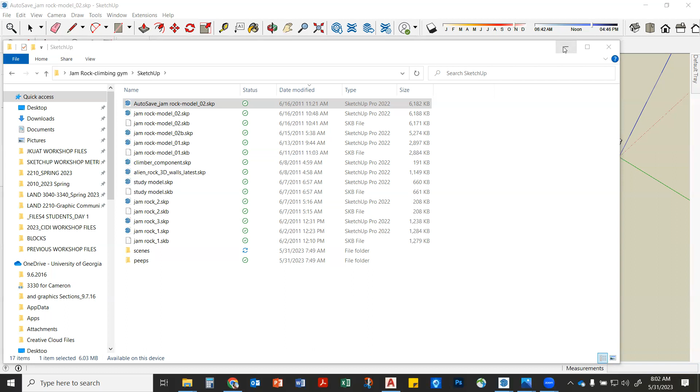Okay, so I wanted to show you this, I had to dig it up out of the archives. I spent 6 weeks before I moved and lived in Uganda. I spent 6 weeks in Uganda hanging out. There's this ministry down just down the way, and they were like, oh, we want to build a rock climbing gym. For climbing, right? And I used to rock climb back in America, and I was like, well, I know SketchUp, I will design you a rock climbing gym.

So I designed this rock climbing gym for these guys. They were just like, well, maybe it'll happen, but anyway, look, I designed this whole 3D thing. I just started using SketchUp. This was their whole idea, so I'm building this thing. You can see all these cool views we can do.

I'll try to actually show you how to make scenes. A scene is just like a window view. So I designed this whole thing, and I was like, man, I don't know if anything's ever going to happen with this. So then listen.

So then 10 years later, I'm in Athens, Georgia, where I live in the USA, and I'm flipping through this climbing magazine, it's just called Gym Climber, for people who climb inside. I flip open a page, and there's the climbing gym that I had designed. I was like, what? They built this thing.

So it's called Blue Sky Adventures here in Uganda. Have you guys ever heard of it? I'm hoping I can go down there and actually see it and be like, I should climb for free here because I helped design this place. Isn't this awesome? So cool.

So that's another plug for SketchUp. Once you learn to design in 3D, you're not stuck on landscape. I was like, yeah, I could figure it out.

I mean, they didn't build anything from what I designed, but I gave them the concept, and then they were able to raise money and actually get somebody to come in and design it and build it. So when I was first working with them, this is what the space looked like. You can't see it, but it's just an empty warehouse.

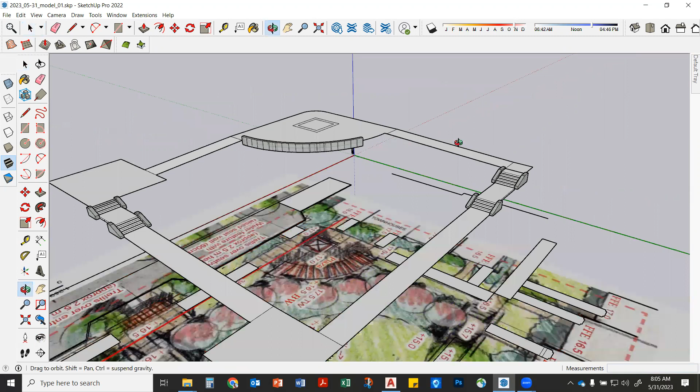But we're getting pretty close for you to be able to do most of the model. But now we need to build and model the 3D tin, and that's basically how we can quickly do topography. That's the cool thing about SketchUp. So that's what I want to do.

And then I want to close with a little bit of drawing, okay, and prep for tomorrow. So look, I've got all these section elevation trees. These are ones that I drew in pencil.

I just want to give you each one of these, and I want to trace them real quick. We won't trace all of them because I just want to spend about an hour doing it. But then I want to show you how I would render with colored pencils. I'm going to do it quickly, and then you guys can practice some of these, and I'll use the document camera and record it, okay? Does that sound good? Okay.

Because the workflow that we're doing here is not just SketchUp modeling. I use SketchUp so much, and then I actually go back and forth and use hand graphics, because this section that you got yesterday is actually cut through our model. It's cut through that little site wall right there that I just drew up here on the board, that we just modeled. And there's a little trellis there. I'm going to show you how to drop that trellis in there tomorrow.

And then I'll probably jump ahead and show you how to cut a section on this, because once you have the SketchUp model, it's really easy to export a section like this. You can even clean it up and actually use that section in your drawing set, or you can draw over it like I want to do.

Okay, good. All right. So I'll try to keep all the long random rabbit trail lectures down so we can get through all of this, okay?

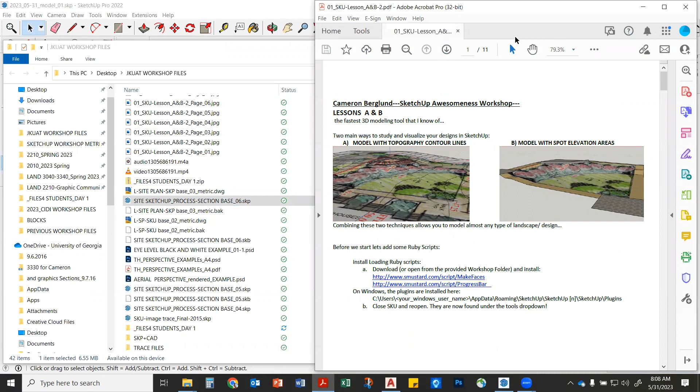Might take a minute, but here we go. All right, so we've been working on this, right? Now the next thing we're going to do is create this tin right here. So we've got all of our walks done, and we even have it better than this one. Looks really nice. We got stairs, we got walls.

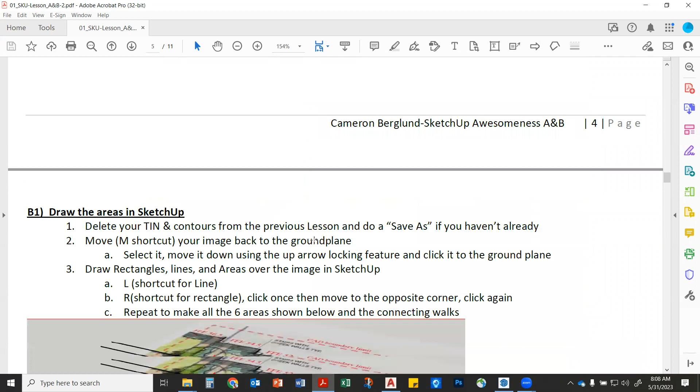So look, if you're not sure with the process, it's also in this PDF that I gave you. So if you follow things better by reading them, you can come through and actually follow all of this along.

Now you'll notice that on the plan in there, the units are different, because when I initially wrote this whole lesson, it's all in imperial units, in feet. But don't worry, the only thing it changes is how high you move your things. So the whole workshop, the whole lesson plan will work because we're doing the same thing. You'll just be doing it in meters versus feet, okay?

So we went to there, and then we're here, right? We're about to do this guy right here: number 6, create a tin surface.

Tin, tin, tin, tin, right? Yeah, we can cheat. Okay, yeah.

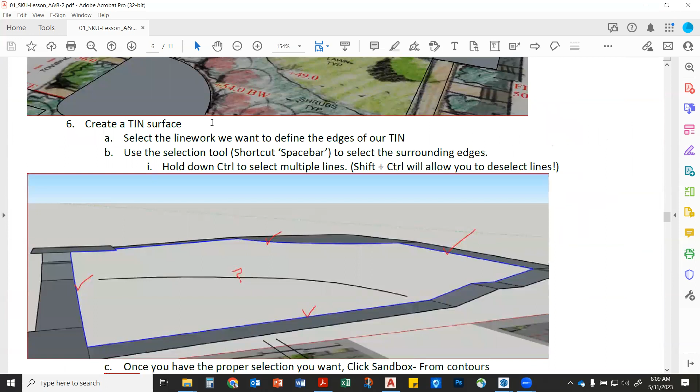And you'll get bonus points tomorrow if you find out what tin stands for, okay? Because I should know that, but I don't. I know it's triangulated something network, but that's it. Don't tell me now, you won't get points today. You got to show up tomorrow to get those points, okay?

So look, all you have to do is select the line work you want to define as the edges of the tin. It's hard to see up here, but if you look on your PDF, I'm just outlining this whole thing. Some of us did it yesterday, yeah?

Now, the only tricky thing is that some of these things we've been working on are in different groups, so in order to select that line, you have to go into the group. So just for the ease of doing this, we're going to explode not our actual walls, but just the walks, so that we can select all of that line work. I'm going to walk you through it, don't do it yet.

I'm just talking through it. Then we're going to select all of that.

We're also going to draw this contour in there because we have spot elevations for that. Then once we select those, pow, see that? Pow, pow, pow, pow, right? We're going to press one button in the sandbox from contours, and then we're going to get this beautiful tin right here.

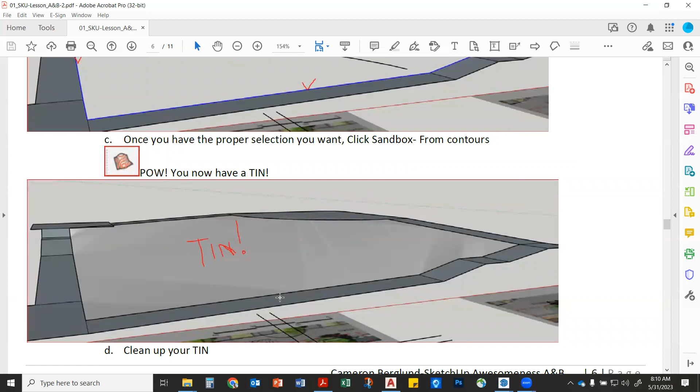Okay, and then we're going to have to go in and clean it up a little bit, because when SketchUp makes tins, it connects all of the lines to all the other lines. But there are areas where we don't want it to connect, like on that walk, we don't need a tin up there—we already have a flat surface. So we'll go in and clean that up a little bit.

Good? I'm giving you the overview and then we're going to walk through it together, yeah? And then you'll have this. So, tin, okay.

And then from there, I'm going to show you how to cut a section. And look, the same thing—we're doing the same thing that we did with all of those other things, right?

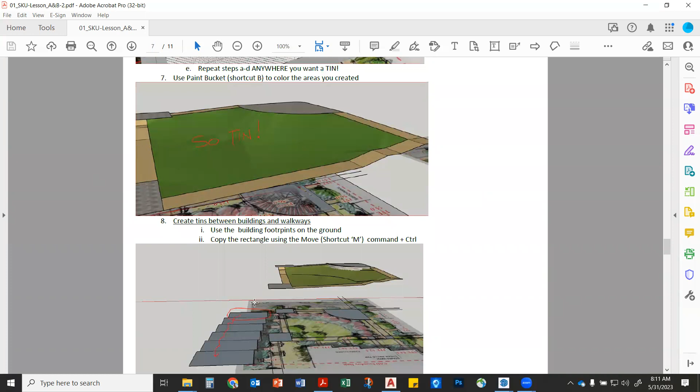We're going to import the footprints for each one of those townhomes. You see this? We're just going to go File, Import, bring in the townhomes. And then for every one of those townhomes, we have a finished floor level, right?

And you're going to make that a group and you're going to extrude. Actually, they're already blocks, I think. So you're going to extrude those up to the correct height right next to your walk.

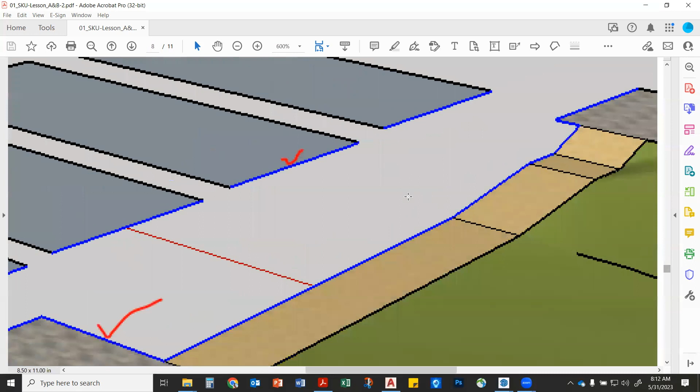Right? You're gonna build the walk down here. And then once you know how to make a TIN, you're going to select all those areas in between. See all those blue areas? We're selecting those lines, and then you're going to press that one button and you're going to get a real nice TIN.

Isn't that cool? And then we have to clean it up, because remember, SketchUp doesn't know - it's going to connect all the points that you highlight, so it's going to do some of the ones that you don't want. So you have to go into the TIN and delete some of those. Okay, we could do that.

And then we're going to get somewhere like this. It's going to be awesome.

So this, especially for landscape architects, working with TINs is like the name of the game, right? It really helps you to visualize what you've actually drawn, and then also critique it and figure out what's working and what's not working. And so working with surfaces in SketchUp is actually pretty easy, so you can change things pretty quick. I'll show you how to do that.

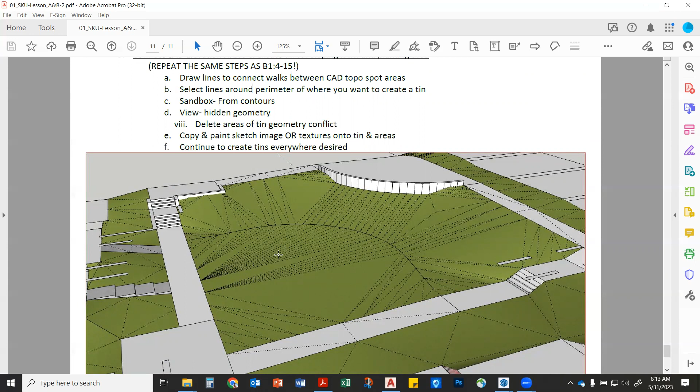Okay, we ready? Who's excited? We got one, we got one. Good, well, we'll start with one. That's good.

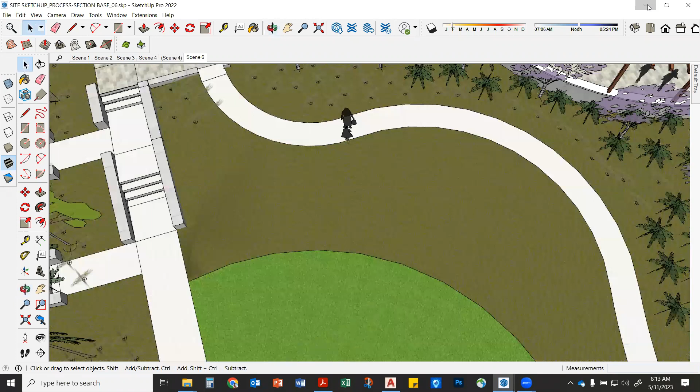All right, so look, this is where we're headed, right? We're going to make this surface right here, this TIN right here. We're actually going to make a couple of them. This one - tomorrow, if we have time, I'm going to show you how to put this walk on there. It's going to be the correct slope, and you're going to love it. So there's that one, right? But we are right here, yes?

Okay, so you've got some walls. Now what we're going to do - oops, my wall's still messed up here. I'll fix that in a minute. But for the ease of what we're doing, I want to double click into here.

And this is what you're going to have to check. Can you go around and select each one of these lines? Can you guys see it on the board? A little hard to see. So can I select those? Now the question is, how do you do it over here, where those walls are?

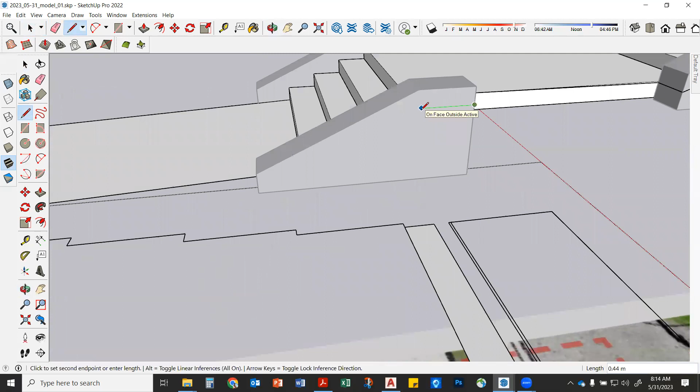So what we're going to do for this exercise - there's a couple ways of making the TIN. You could actually draw a line like this, and say I want the soil to come down like this. And I could make the TIN just like this, and this is exactly where the soil is going to go. And then this is where I get to play - how steep do I want this to be? Do I want it to start here and slope down? So this is one way to do it.

And then I could select this, I could select that line. If I over-select, I could Control Shift to deselect, and I could keep working my way around, piece by piece. So that's one way to do it.

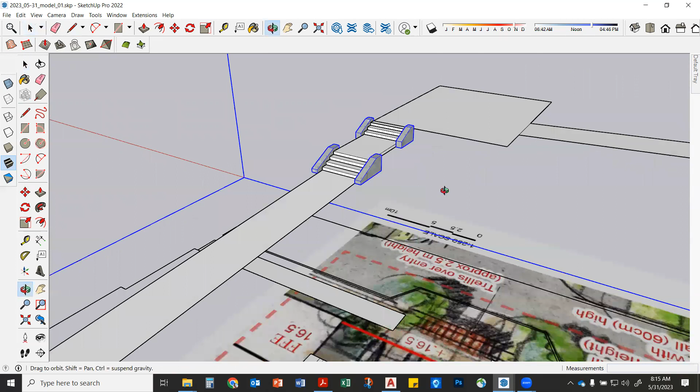The other way to do it is - let me undo that - so the other way to do it is similar, but what I'm going to do is I'm actually going to hide or freeze the layer that I've got for my walls. If I come over here, my default tray - if I hover over that, it should open, and I should be able to, if you have to close some of these little things to find it, close some of those by pointing or hitting that little triangle.

I want to come down to tags. Because the nice thing is all of my layers, when I bring them in from CAD, are going to be there. And so I should be able to turn off the L wall layer. Oh no, didn't. So ideally, all of my walls are on a wall layer, and I can turn them off.

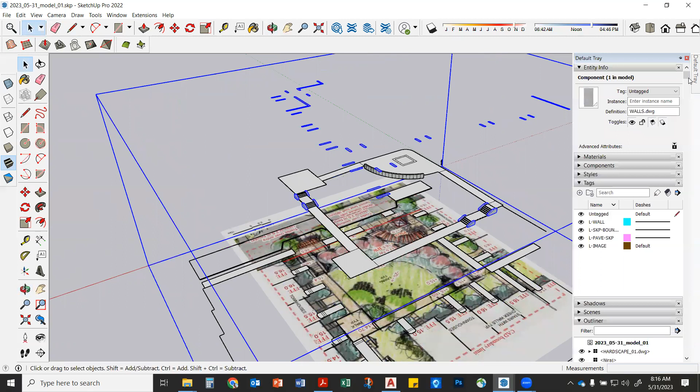But I had them on when I extruded them, I'm not sure what layer they're on. Ah, they're untagged, right? So watch - I could grab this whole thing and I could actually come over here and drop them back on the L wall layer, under entity info. And then I should be able to turn them all off. It's not deleting them, it's just making it so I can actually see. Everybody see that process?

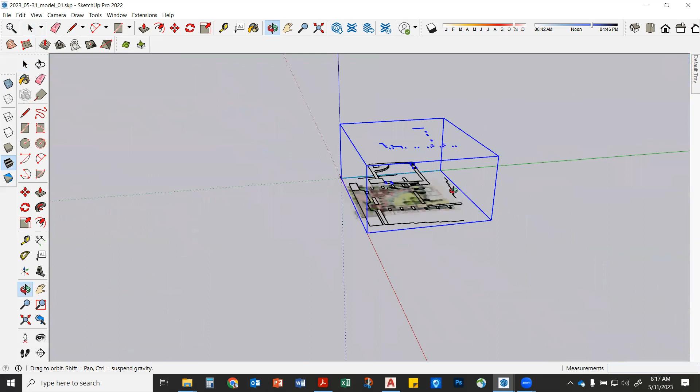So you can click on the walls, even the ones that are up here. You could double click - oh, not double click, just single click - so you have the whole group. Does yours look like this when you select one? All right, and then you could hover over here until it pops out the tray.

And then the top one should be entity info - this is like the properties of whatever you've selected. That's kind of hard to see. Hang on one second.

Okay, so when you hover over the side where your tray comes up, you should be able to come over here, and then right here it should say 'untagged.' So right there where it says L wall, yours will say untagged, right? It's probably not on a layer or a tag. So you can actually click here and then drag it down and put it on the L wall layer, or L wall tag.

Good. Then when it's on the L wall, hopefully all of those will be on there. This wall over here is not actually on there, right?

So I'm going to snag that guy too. Oh, I can't, it's in that. I'll have to go get him.

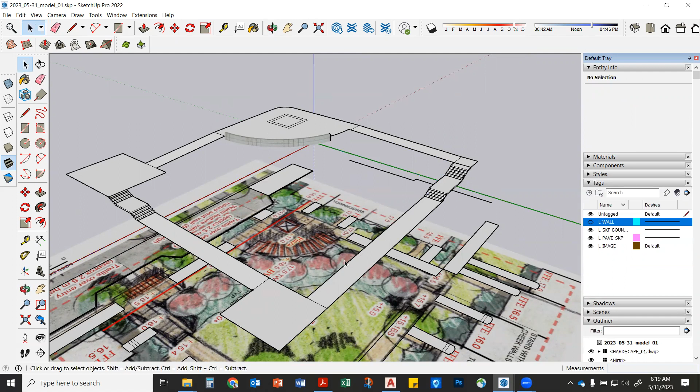So I'm going to show you both ways to make the tin, but this would be if I was doing this quickly, this is how I'd do it, okay? Because it's a little bit easier if we do it this way. So everyone's walls are turned off, or hidden.

Okay, let me go in. I have to go in and get rid of this guy. So what am I going to do? I'm going to go into the group it's in, Control X, right? Oops, I need to turn that back on.

We go back into this group. Then what am I going to do? Edit what? Paste in place, right? I'm going to place it into this group. So now when I turn that off, all of them should go off, yeah?

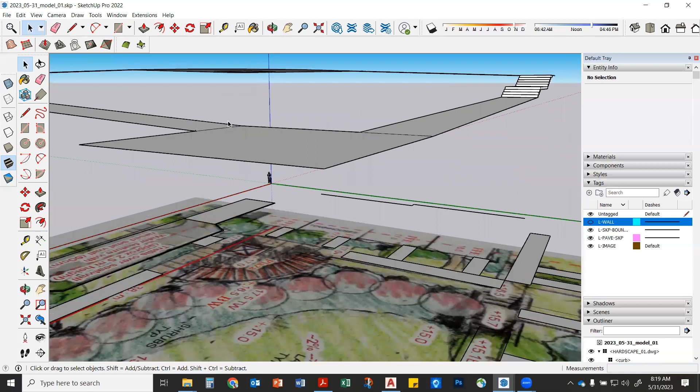How are we doing? That look good? Yours look like this, or close to it? Perfect.

Now there's a couple other things we need to do. Look, we look at our spot elevations. We've got the perimeter walk worked out, right? We've got plaza at 17. We got that wall in there that we made. We got this little lower area at 16.5. We've got, all the way down to 14.7. We got our stairs and all that stuff, right?

But look, in the design, there's also a 2% lawn at the bottom, right? So if we don't actually put these spot elevations in, this isn't going to look correct. So all we need to do, I showed some of you guys this yesterday, we need to make sure that we have a line from here at 15, 15, 15, yeah? And then we're going to select that as one of our edges when we make the tin, and it's going to make the surface including that elevation, right?

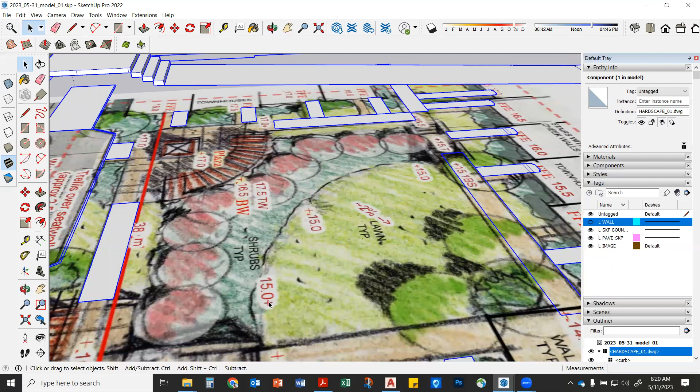Close enough, just follow me, you'll see why we're doing it, right? So watch, we got 15 right here. That should be right around there. So what we're going to do is we're going to come in.

We're going to use the arc command. You could do it in a lot of ways. You could come in here and draw it freeform with this little freehand drawing, you could go like that, but it's going to look really ugly, yeah? Because you'll see that SketchUp's going to triangulate between all the points on that line.

So what I want to do, Control Z, we're just going to use an arc. So you can type in A for arc, or you can come over here and select that little icon that says 2-point arc. Okay.

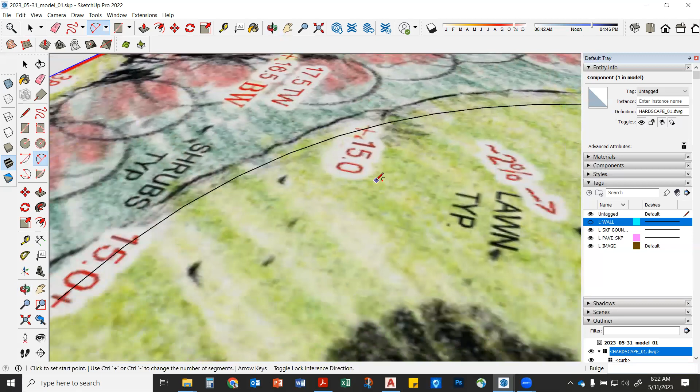Good, and then watch, I'm just going to go to that little plus because that's where the 15 is. I'm going to go click, one, click, let go. And I'm going to come over here and click this one, click. Then I'll come over here and I'll click my third. See, it lets you choose where you want it to be, right? Should be able to click it right there. Good.

Repeat, okay, so we're here. It doesn't really matter, I guess we could click, you could do it inside this group, but we'll just move it in there because we know how to do that, right?

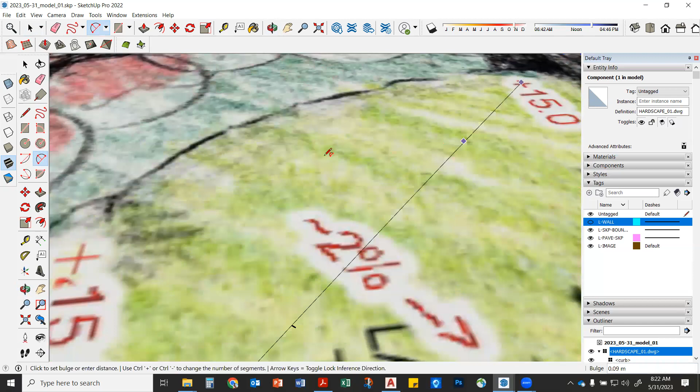So you're going to hit A for arc. The first point, now this is a 2-point, it's called a 2-point arc. So you're going to do the beginning and the end, and then you're going to assign the middle. Okay, so watch, you'll click on this 15 right here, click once. Now it's asking for the end point of the arc. Click there. And then we're coming over here and we'll click, pretty close to right there in the middle. Okay, good.

Now I want that line to be in this group. Why? Because I'm going to use it as one of my edges to make the tin. And I can't make it in between if there's things that are in a group and things that are outside of a group. All the line work has to be next to each other in order for me to select all the line work and then make the surface. Okay.

So before we do that, what height should this be at? How do we do that? Once you select it, right? With an arc, you only have to click it once.

M for move. Pick the point on the end, click once. Lock it to the upright with your up arrow and type in 15. Okay, now hopefully it's showing up something like that, right?

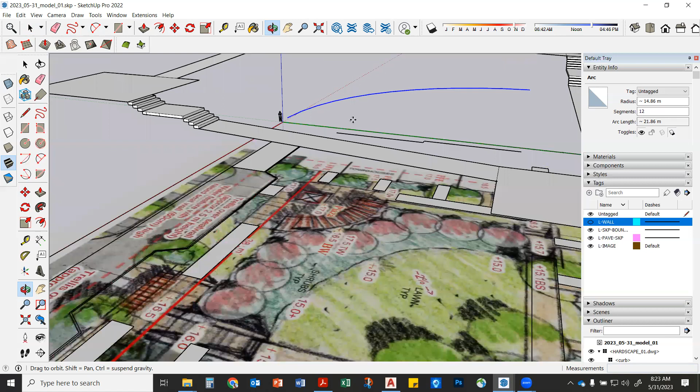Good. But is it in that same group? It's not. See? So how do we get it in that same group? We're going to cut it, paste in place once we're inside that group, right? Control X.

Double click inside that group till you're actually in there. You can tell you're inside of a group when you're able to select some of the lines or the faces and it doesn't show up as a big blue box. Like, see this, right? This is a component or a group inside of our group, but we're in the main group because we're able to select elements that are inside there, right?

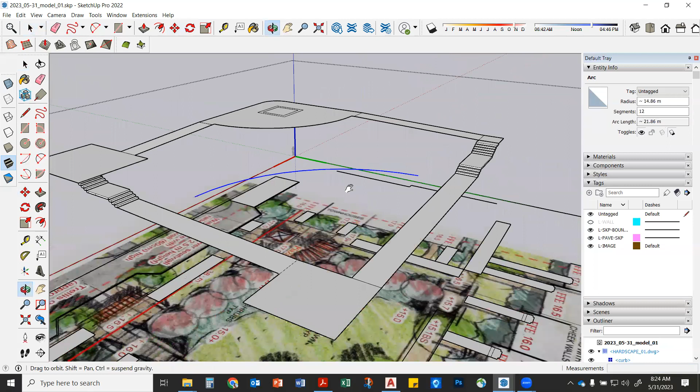So then we're going to do edit, paste in place, boom, right? Right?

All right, now while we're in this component and we're doing selection, this is when you'll get really good at selection because you'll have to do a lot of it, okay? And remember, Control adds to it, Control Shift takes it away, okay?

But in order to do this easiest, I want to go ahead and come up here and isolate just the group we're working in, yeah? So go to View, Component Edit, Hide Rest of Model. Okay?

It's not great, but it's better, right? View, Component Edit. So all that's saying, it's just a setting so that when you're editing a component or a group, you can hide things so you don't have to look at everything, yeah? Because it's sometimes hard to tell when you have so much stuff in a model, so it'll just let you work just within that component, okay?

So I'm going to click on hide rest of model, yep. Oops, I unclicked that setting that time, but right, I'm here, hide rest of model. Okay. There's still a lot of stuff down there, but that is what it is.

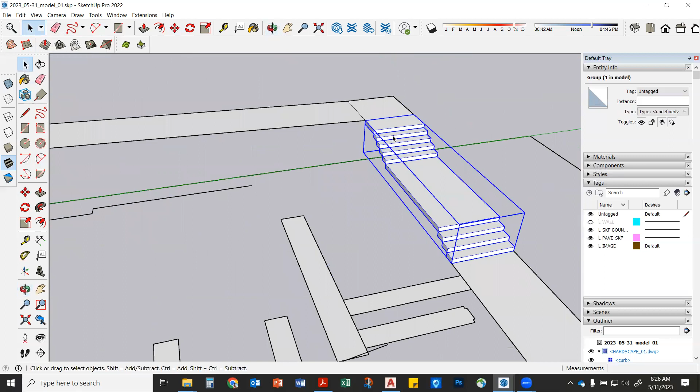All right, now watch this. Ready? Now what we need to do, all we have to do is define, remember how we looked in that PDF? All we have to do is define this edge, right? We just need to come around and get all these edges here and connect them. But look, the issue is some of them are components and we can't actually select just the edge, can we?

So for ease of this workshop, what we're going to do, you can do two things. You could come in and just draw a line, right? We could come in like this, draw a line here, draw a line down to there, draw a line maybe like that, down the face. And let's see if that one, good. So then we can actually do this. Let's actually, it's probably best if we actually do it this way, okay?

So it's similar to what we would do if we were drawing on the walls, right? But what I like to do a lot of times, if I can, I'm just going to hide the grading in the wall. So you can do it either way. You can draw your grading on the wall, because what we're drawing is like where the TIN's going to go. You'll see that, okay?

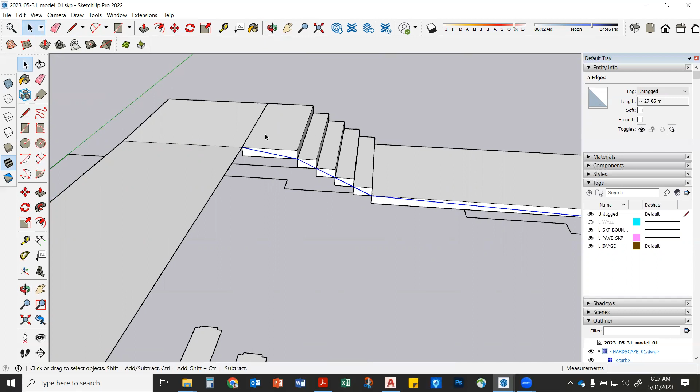But watch, let's come over here. So come to that corner, make sure that you're in that group, right? So we can select some of the walls around it, yeah? So look, if this guy's separate, if you made this one into a separate group, right? If this is a group when you click on it, yes? If it is, just right click and explode it for this exercise, okay?

Because all we need in order to make a TIN is just this line right there. You guys see that? Just need to select this line all the way around. See that? I'm holding down Control.

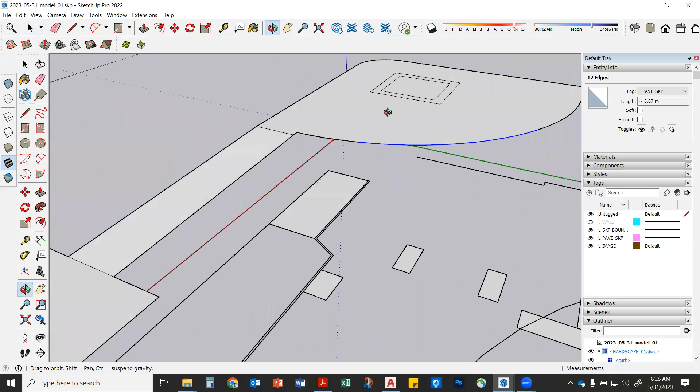I'm selecting these lines just along here. Now, you do have to be careful because all this stuff down here - maybe we should put all this in one group so it doesn't get messy. Let's do that, okay? Watch this.

Sorry guys, in order to ease your selection, watch this. If I do this and select like this, I'm going to select all those things below it. Even if I'm careful and doing this, you're still going to get some of those things down below. So let's make it easy on ourselves and just make this whole thing up here one group for us to work in. Everybody tracking?

So all we got to do is select all that. We need to be inside that group. You can grab that.

What are you going to do now? Yep, you're going to hover over it with your mouse. Make sure that the cursor's over the top of some of that line work. Right click, make group. Okay?

Now, the nice thing about that is because I have this setting, component edit, hide rest of model, if I go inside this component, everything else is going to be hidden. Isn't that nice? So now selection is going to be a lot easier because I'm not going to select things in the background that I don't want.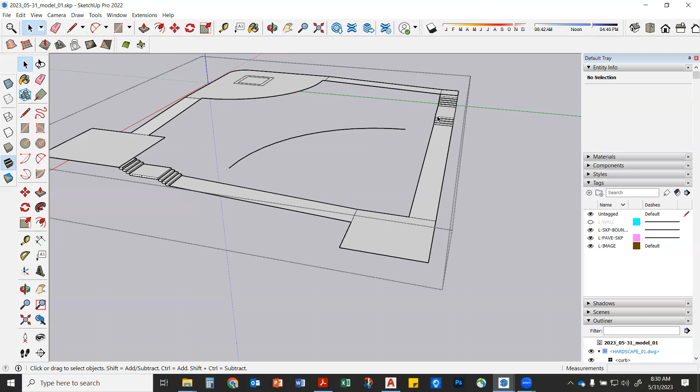The other thing you can do - remember, all of my model is still there. All I do is click inside a component to edit it, and then it goes away. But see, if I turn off that setting, it's still all there.

We good? Got it in a group? If you don't have it in a group, don't worry, you just have to be more careful with your selection. If you're having trouble getting into a group, the other thing you can do is just do a save as of your file, and you can delete everything else out of it and just work on this one part. Do you want to do that?

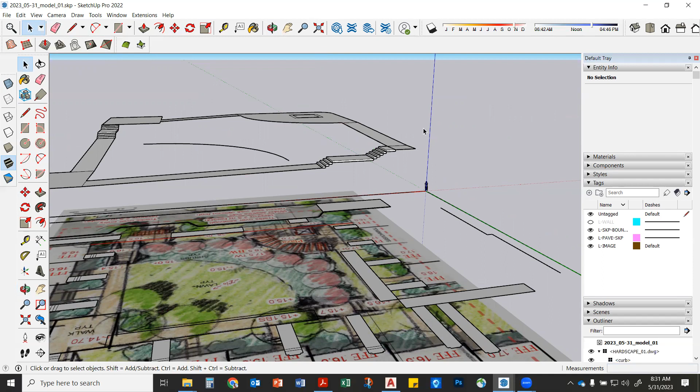But do a save as before you delete everything. Do you guys know what I mean by a save as? Right, so if you wanted to, you could do file, save as. Mine's called today's date, model 01. You could call it model 02. Hit save. Then you could just delete all the stuff that isn't right around there that we're working with.

You don't have to do that, but if you start running into a lot of issues with selection stuff, that might be a good option. But are we here? I'm gonna keep going, because I wanna make this TIN with you guys and then do some other stuff.

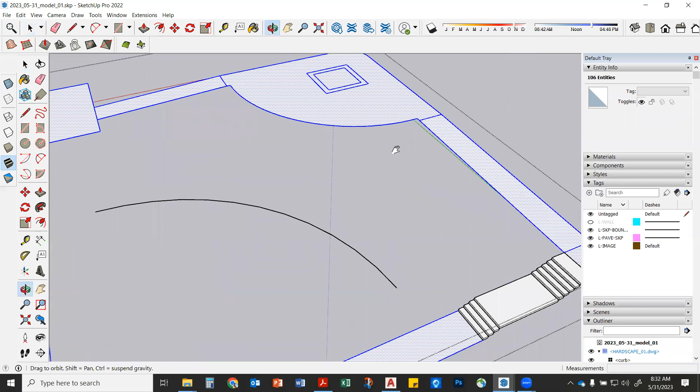So I'm gonna double click inside my group. I'm gonna go ahead and turn on that thing where I can hide the rest of the model. Here we are. Now look, all of these lines - I can actually select them, right? So watch me do this real quick, guys.

So even along this edge, I can use my selection tool. Holding down control, I can select that whole edge. Not all of it, but I have to go a little piece by piece. So there's a couple ways of doing selection. Watch, so that's one way.

I can use the window from left to right, and everything I get in there, everything that's completely in there will be selected. If I go the other direction, I run into a lot of issues because it selects stuff I don't want it to. But even that's not a problem because I just hit Control Shift and deselect.

Okay, everybody see that? The hardest part is selecting this area over here, this little curve right here. But it's not that hard, you'll figure it out. Watch, there's another way to do it though.

Watch this, real quick. So you can come along like I'm doing. And you could go select - oops, see if you go right to left, it's gonna select stuff you don't want. So you're gonna go left to right. It's gonna grab little pieces, hold down control. You're doing this all day long.

Okay, there's other ways, watch. There's actually some tools where you can join that and then you can select. Do you know that one? What's that one called?

Look it up for Friday, right? See if we have to pay for it. I don't know, because I'd love to show it.

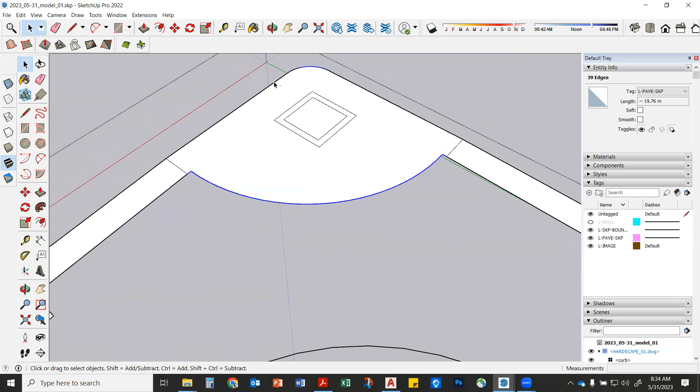Lots of ways of doing things in SketchUp, yeah? So now that whole line is selected. Now watch, I just keep coming down here. I'm gonna select that line, right? I'm gonna come over here, hold down Control, select that line. Oh, we're getting so close, right?

Is this one in a group? If you group this, you might have to explode it. Let's see—nope, mine's not a group. But if it is a group, you can actually explode it, and I think it won't change your selection. Might have to. Right, so we're coming around to there.

Ooh, but look, right now it's selected all the way over there. I don't want grass over there, do I? So watch what I'm gonna have to do—I'm gonna have to draw a line.

L, I'm gonna come this way. I'm gonna click here and draw where I want the TIN to happen. I'm gonna go there—top of riser to bottom, right there, okay? Then I'll deselect, Control Shift, take that guy out.

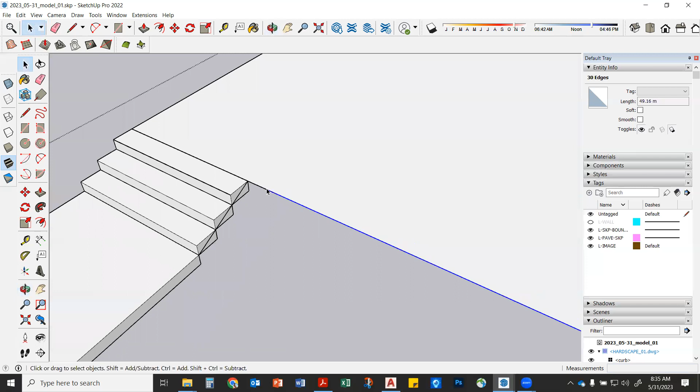So real quick, let's back up, because I want to cover this and make it as seamless as possible. We're going to have issues in my model, and probably the same in yours, wherever we have these groups, okay? Because we can't select that line work—it's a group within a group, right?

Easiest thing for us to do is draw a line down the stairs on the side of it, in the group where the rest of the lines are, yeah? Then we can go through and select them all, okay? So let's do that part first.

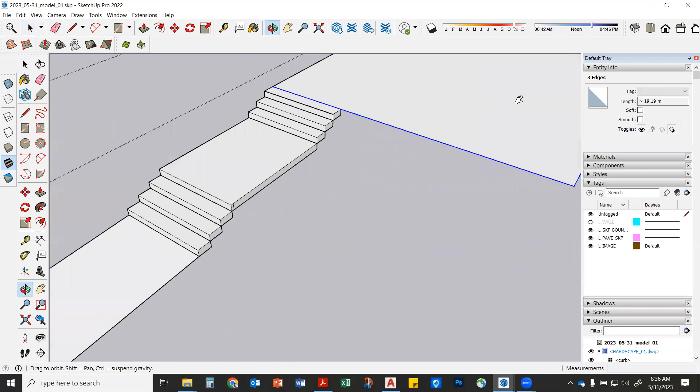So come over here—I've already started to draw, but I'll start again. Make sure you're in the correct location, meaning the correct group, so you can select the edges you were just working on, right? So that's correct. Now let's come through and draw these lines together.

I'm just gonna hit L for line. I'm gonna come up here, and all I'm indicating is where I want the slope to go. We're basically doing site engineering whenever we draw these lines, yeah? So watch, I'm gonna draw this straight down the edge of those risers. Click right there, come over here.

I could click right there, but watch—I'm actually going to make the slope go down to the end of here. It doesn't really matter, you could do it up there because it's going to be hidden behind a wall. And then I'm going to go down the stairs to right here.

Now hopefully my paths—I can select that line, so I shouldn't have to draw any more lines, but let's check. Can I select this line? If you can't, and it's in a group, just explode that group, okay?

Because I know how we were making some groups so they wouldn't stick. Now, just for us to make the TIN, you just kind of explode them, yeah? Like on the stairs, I wouldn't explode them, but on the paths, you can. And that's even debatable—down the road I'd probably just go in, copy that line work from that block, and bring it in. Don't worry about that, there's lots of ways of doing things in SketchUp.

But watch, look—so now we've drawn the lines over here, right? We have a line we can select all the way through here. You guys see that, right? And I could come up here, select this one, select that one. Hopefully right here, when I drew that line, it broke this line, meaning it's not going to make a TIN way over here.

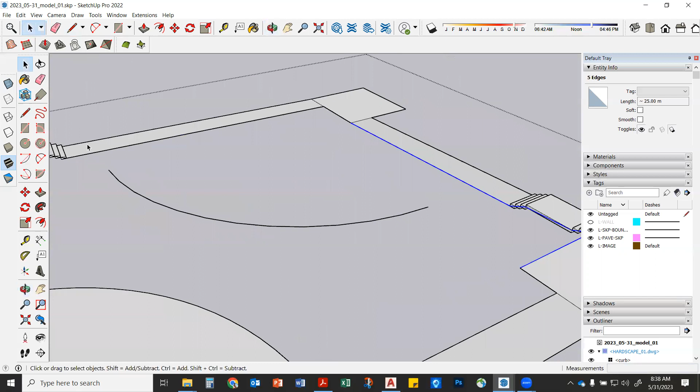Okay, so we can keep coming around, but before we select all of them, let's go over here and draw a line, if you haven't already, through these stairs, on the inside, right? Everybody tracking?

So I already drew mine in there. Think about where the soil's going to be in relationship to these stairs - it should be at the base of each one of those risers, right? Does yours look kind of like that? Close enough? Good. And then along that walk, I had mine sloped down to the bottom of that riser. Then I drew another line through there. How we doing? Good? Somewhat?

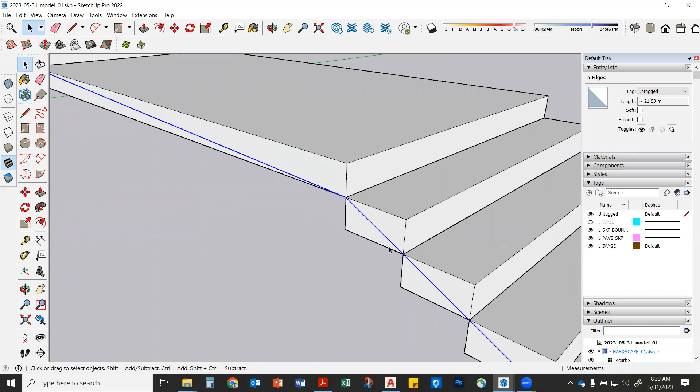All right, I'm going to show you the final part and then circle back. So now all I got to do is select this - in order for the sandbox tool to work, I just have to define the edge I wanted to make a surface through. So I'm going to select all these lines. I'm holding down Control and selecting the whole perimeter.

You want to select that contour we made too - we'll do that in a minute. We did this, and here, up to here, holding down Control every time. It's growing, look at that. To there, to there. Yeah, I got it all right there. Need to get this guy.

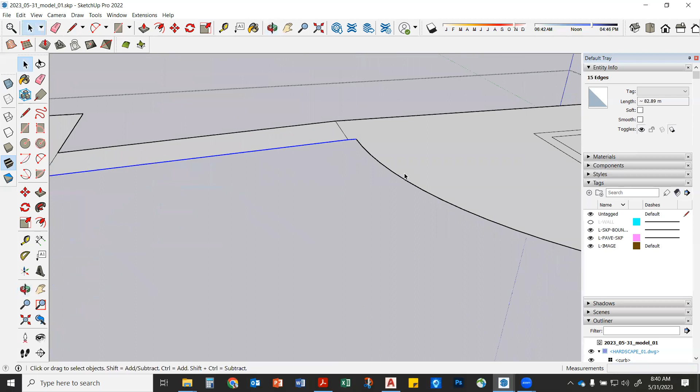Now the neat thing about SketchUp is its selection tool works pretty good, because I could, remember that trick I showed you, select this whole area and then deselect stuff. So I could continue to do that, or you could come in and use your left to right window - hold down Control and just select each one of these edges like that.

Okay, now I'm missing one, aren't I - the 15. What would be the difference if I didn't have the 15? Should we see? It's not going to drop down, right - it's going to go from top stretched all the way out to the bottom. And that's not what I want.

Let's see what it looks like if I just do it this way. See? Now it's basically going from this elevation straight down, and the problem with that is down here at the bottom it's not flat enough for Gatere to play baseball - he doesn't want to play on a hill.

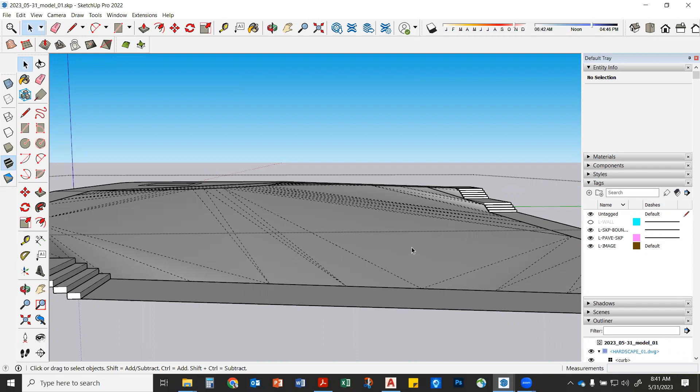So we've got to fix this. The client is very upset, okay. So Control Z, we're not going to do that.

Now I got to go back and make my selection again, but I've done it enough that these things just take time. So we're just going to go back - I'm going to use that trick where I select the outside, or let me select the whole face and then add to it.

Okay cool, look, got all the outside, right? Got my little slope through the wall. Now we're going to add this in because we gotta have a spot for baseball. I didn't know baseball was so big, Kenya. Big time. All right, ready?

So then all we gotta push is that little button up there from our sandbox thing. Remember yesterday, if you don't have your sandbox toolbar up here, you just find a space where there's not a toolbar and you right click. Make sure that you check it - it says sandbox, believe it or not. Once you check it, it pops up a little window, and you can drag that window and drop it up here next to your toolbar.

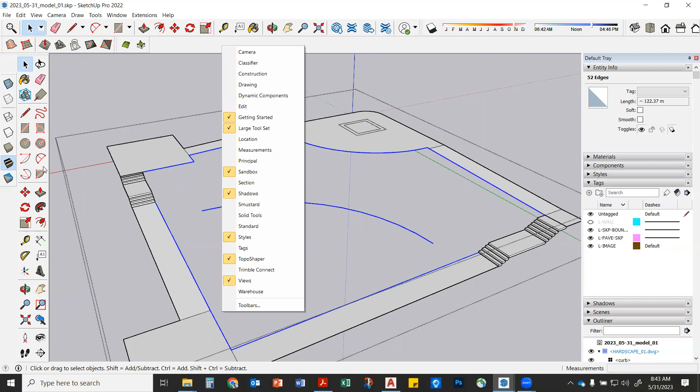Because this is my favorite button in SketchUp - the create terrain from a set of selected edges. We ready? Boom.

Ooh, do you see that? Look at that. Samuel's going to stand right down here. I'll be right here on the pitcher's mound, and I'm just going to throw him a curveball, even though it's his birthday. Strike. Okay, so we got a nice 2% grade down there.

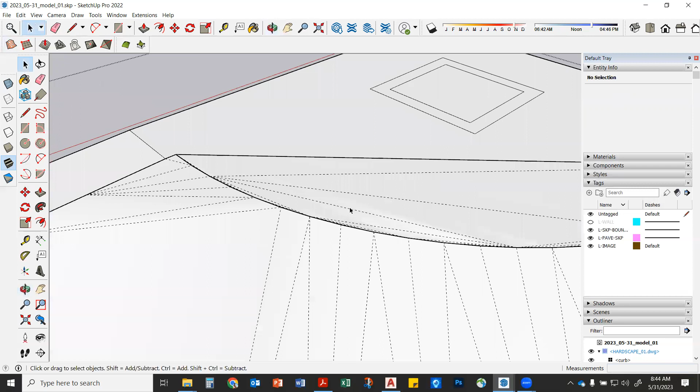Now some of this is wrong, right? You see this, all this stuff up here - SketchUp doesn't know that I didn't want them to make a TIN from here to here, so there's always going to be a little bit of cleaning up. But look how it made that TIN down my stairs - isn't that nice?

So watch, once you make the TIN, we need to go in and clean it up a little bit. We're going to double click just like a TIN - anytime you make a TIN, it automatically makes itself into a group. You can see I click on it, it looks like a group, doesn't it? Because it is. Then I double click inside.

Now at this point, I want to turn off component edit, hide rest of the model so I can actually see. You see how it's flashing? What does that mean?

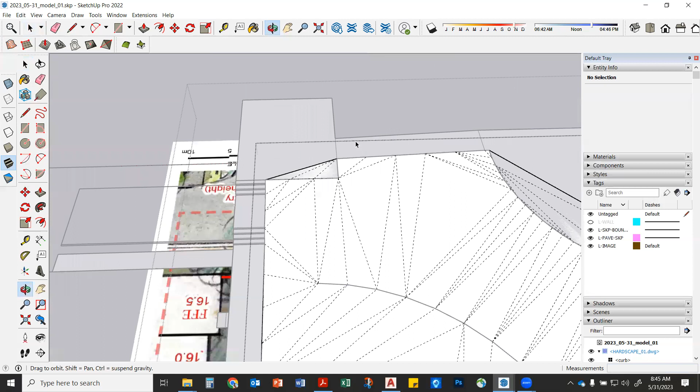I have two faces stacked on top of each other. That's because I told SketchUp I wanted it to make a surface from here to here, but it didn't know I wanted to go point to point. So once I'm inside that group of the TIN, hit E for eraser, then click and hold down and drag it. Or if you want to take time, you could click on them individually. Or zoom in, hold down, and pull it across.

You want to clean up all these little extra edges along here. Zoom in a little bit, clean them up, clean them up.

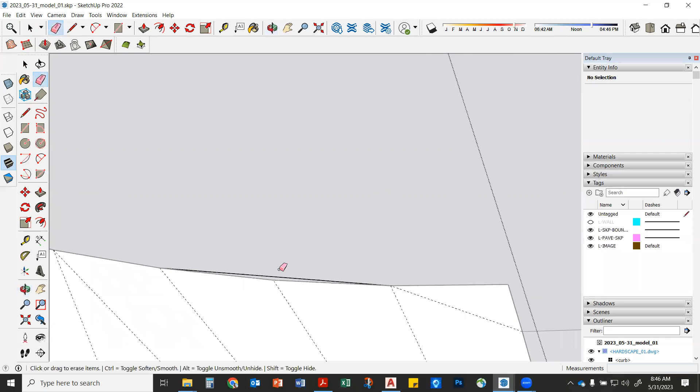Now, if you accidentally erase some of the TIN you wanted, what are you going to do? Control Z.

But if you accidentally delete something and forget to Control Z, you can just make a surface again by selecting the edges. Select that one, that one, that one. And then what button? From contours. Boom. Now the trick is every time it makes a TIN, it makes it in a group.

See that these aren't connected? That can be helpful, but it can also be a pain if you're trying to color this or work with it. So sometimes if I have to make a repair TIN, I'll do that, then I'll just explode it.

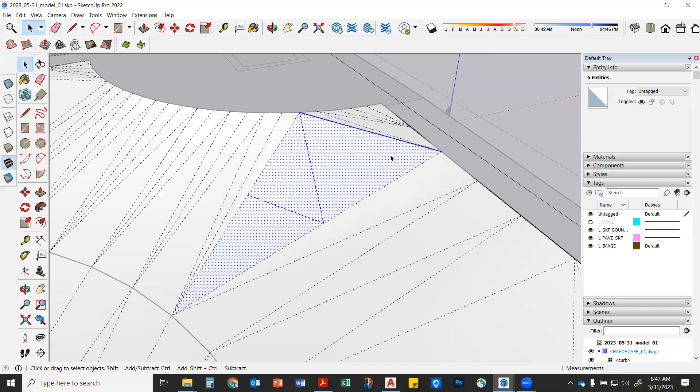Now, if you don't see all these little dashed lines, that's because you don't have View Hidden Geometry turned on. Does yours show the little dashed lines or not? If it doesn't, that's because you have to go to View and make sure you turn on your hidden geometry. That shows you all the little triangulations that SketchUp made to make your surface.

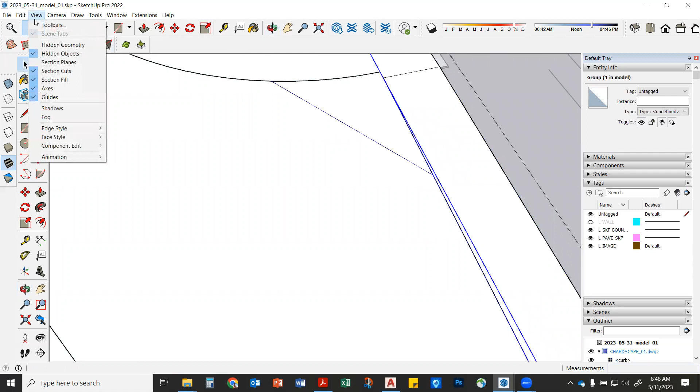That's the key way to get in there and actually make all the changes and clean it up. But here's another little thing: I got to turn on my hidden geometry. So when I made that other TIN, it actually made a line over here. See that line? I don't like that.

So I can come into the TIN, and instead of erasing it, because that'll actually ruin my surface, you can just hold down Shift and hide it. So now it won't show up, or hopefully you won't be doing that.

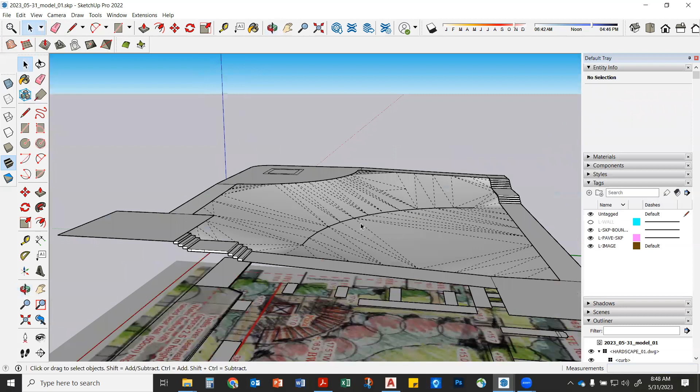Okay, how we doing? Did everybody get the selection done? Who made a TIN? Did everybody make a TIN? Does anybody have a really ugly one where you selected some stuff that was wrong and it's all stretched out? It happens. It all comes down to whatever you selected. If you select the stuff below it, it's going to triangulate a surface all the way down, anything you selected.

Now look, I can turn my walls back on real easy. Click. And then you see how that wall holds back some of the grade there.

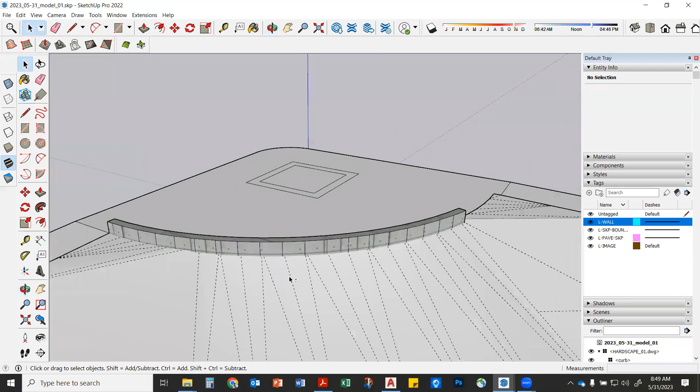Okay, so how can I help? Where should I back up to? Or I can just give you a few minutes. Yeah, you got some time.

And we're back. So when I designed this, I wanted this wall to actually retain some soil because I didn't want this slope to be so steep. So watch what we're gonna do.

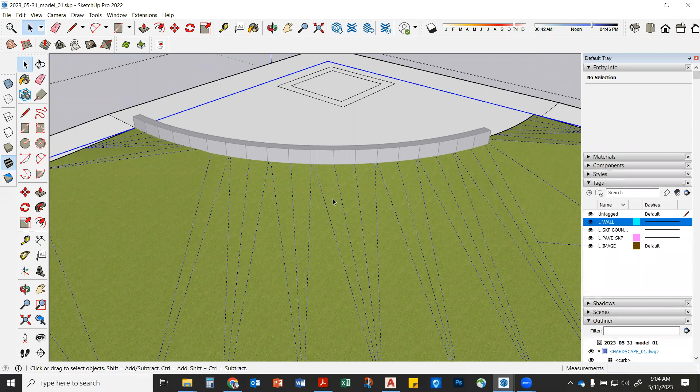We've made our TIN, right? We're gonna double click inside of it. I don't care if you've colored it or not, it doesn't matter. You can paint bucket it later, we'll get into some of that on Friday hopefully. But I'm gonna double click till I'm inside here, making sure I'm inside the actual group.

Now watch. There's this other neat little button over here called Loft or Depress Faces to shape a terrain mesh. It's the third button over on your sandbox tool. Loft or depress. So you're going to select that. Click it.

Now look, if you zoom out, my default is 10 meters. Do you see that red circle? That is the radius it's going to start to push. Anything in that circle, it's going to grab the grip and push it down or up, depending on what I'm doing.

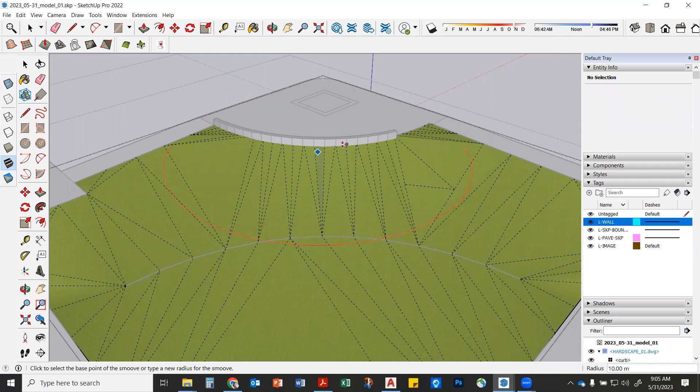So watch, if I click here, it's going to grab all this and push it down or up based on whatever we're in. If I want to be more detailed, I can decrease the size. Right now it says 10.00 meters. Before I click anything, I just selected the command, I'm floating around, let's drop that down.

Maybe let's see what 5 meters looks like. Before you click anything, you just type 5 and hit enter. So you type in 5. Hold on, get over here. 5, enter. Hey there.

But ideally it works, especially when you're showing everybody. Hang on, I'm just glad he's not taking a video, huh?

Oh, it worked. Okay, so before I click anything, I should be able to type in a number. 6, enter. And then if I move my mouse a little bit, it should update the size. So I have mine at 6. If I wanted it at 10, I could hit 10, enter.

And then when I move it around, it changes the size. All right, let's go to 5. So 5, enter, and when you wiggle it, it should make it down to about this size. Watch what this is going to do—this is the cool stuff about SketchUp. I'm going to click here. See those little yellow grips? It's going to allow me to push them down.

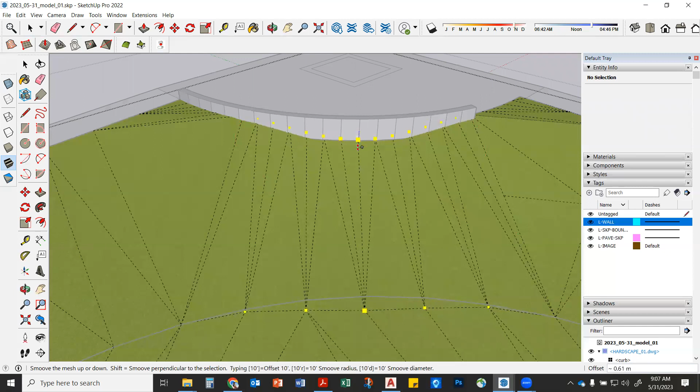So I can actually come over here to the middle and drop it down to maybe where the bottom of that thing is. Might even be able to lock it on the axis. Yeah, I can lock it on that axis.

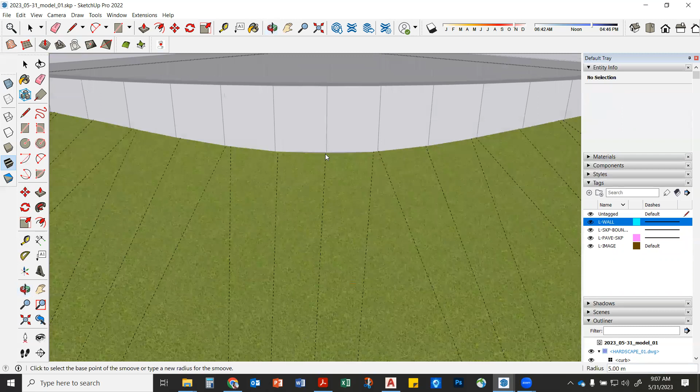And then I can actually push that down so it's close to the bottom of that wall. Or I went a little bit far, so maybe come back in here, click on that again—oops, not drape, but smoove, right?

You can pull it up a little bit. And if I want to fine tune some of this edge over here, I can type in 3, enter, and it'll see how it reduces. It's almost like you have a big balloon and you're smashing down or pulling up the different grips of that thing.

So I'm going to click here and then, ooh, look at this slope coming down, right? Good night. There's an architect in the room—otherwise I would have said architects don't get to do this, but they generally don't. Engineers, they don't get to have this much fun. They would just be like, well, that needs to be a 1.2% slope, and then they would do it. But we're like, we want it to be 2% and we want it to work and look good.

I always like to trash talk engineers too. It's a lot of fun. You know, it's kind of fun.

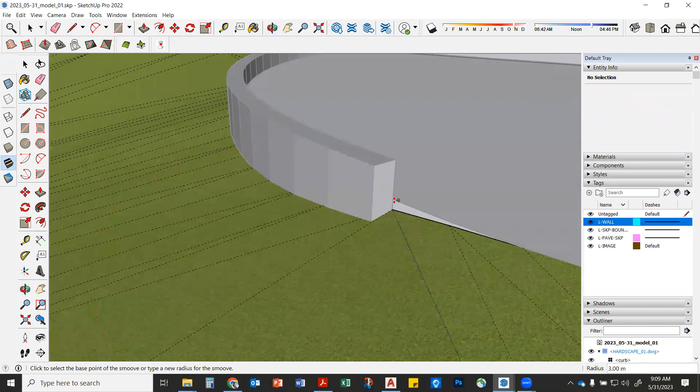And then look, I actually pulled it down too much—there's a gap there. But watch, if I'm still inside the tin, you can actually come in. If I go back to my selection tool, I can move different parts of it. If I'm inside the tin, you can tell because I can click elements. But if I click outside, so it doesn't give me a selection, I can hit M for move, hover over that little point, and it allows me to just move that one little vertex.

So then I can bring it up to right there. Click this one, I want to bring that up to there. Now, if you're walking up to the edge of this from the plaza, you don't have this problem because your wall is correct. Mine's not, but you can actually see where that slope is occurring down there. Isn't that cool? Pretty fun.

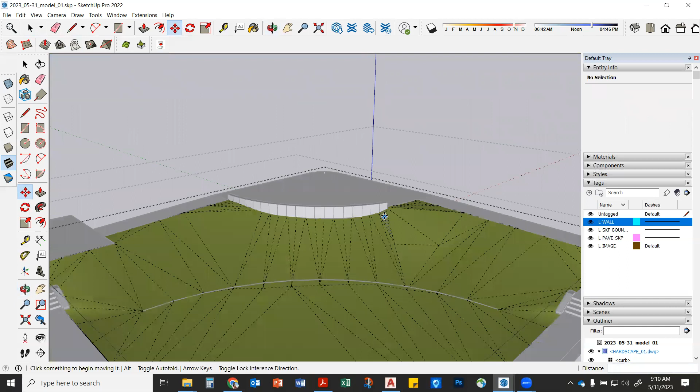Okay, that's the actual sound that it makes when you do that. Yeah.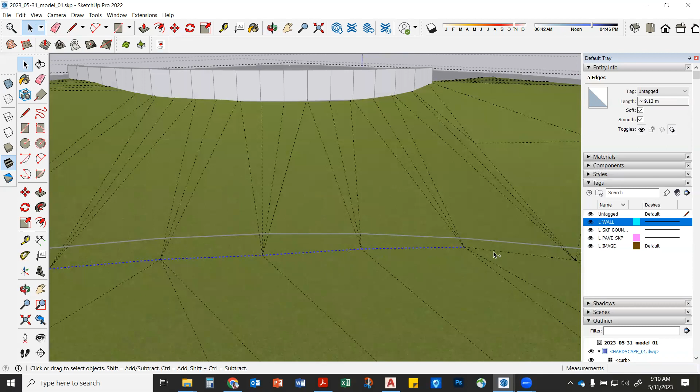Oh, but look, I went below 15—I may have made this too shallow. Because if that's supposed to be 15 right there, I need to pull it up. So we could come in here, I've got a couple of options. I could just grab this line, highlight the whole line, hit M for move, and actually move the whole thing up. But that's a little clunky—I like to use this guy instead.

Oops. Yeah, I hear some of you guys using it over there.

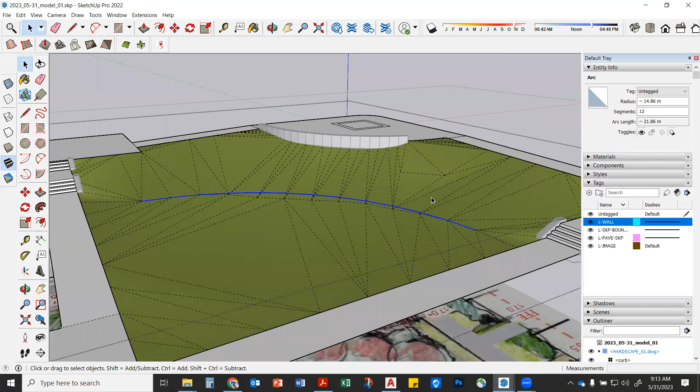So there's lots of ways to use that little button over there. Let me show you how I would do that. I have to export it real quick.

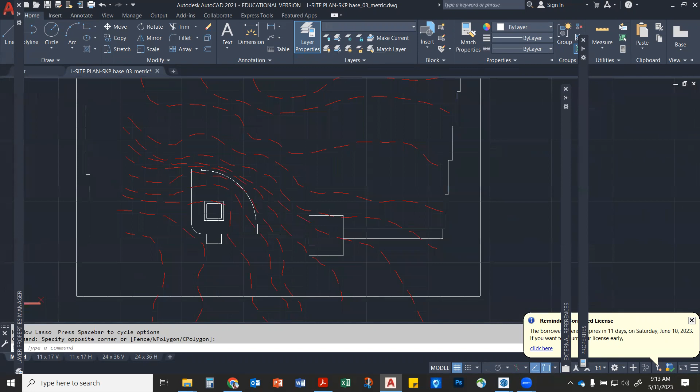So I'm back in my CAD file. Here's a bunch of existing topography. But it all has the correct elevation, I think - we'll find out when I bring it into SketchUp. So I could come here, select that boundary, hit W for block, make that, and call it 'exist topo'.

Then I could come over here. I want to show you how to do this too, because it's so helpful if you get topo or if you've just done a design. The main way we've been focusing on is working with spot elevations, and making a TIN in between those spot elevations. But you can do the same thing by using your contours, and that's what I'm going to show you now.

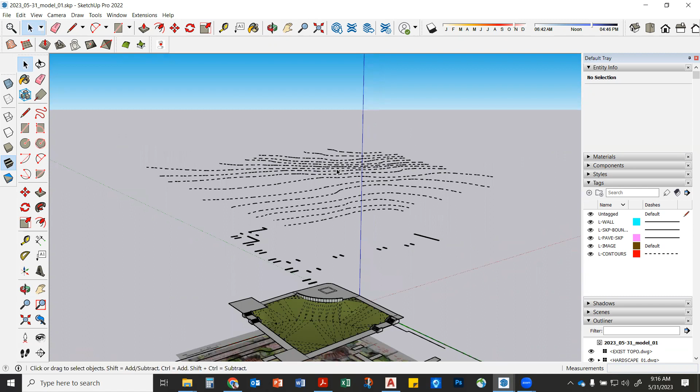But wait, if you actually have topo that has all the correct elevation, watch. I could double click into this - have you guys done this before? Double click inside, you're going to snag all those lines, hit the button, and you have a surface.

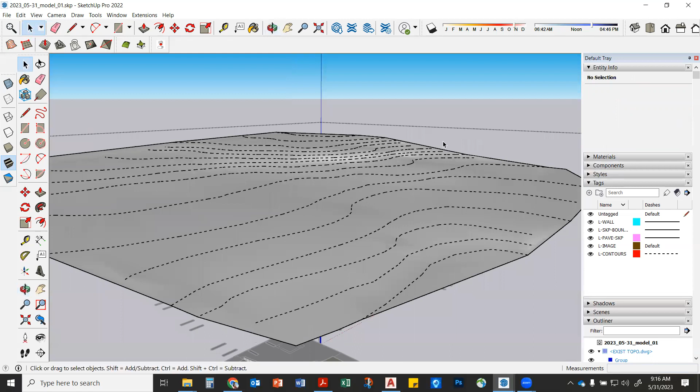Say what? Isn't that fantastic? So if I turn off my hidden geometry, look at this beautiful slope I've got right here. Isn't that cool? I mean, we're talking like that - you can understand your site. Now the cool thing, watch this.

Last thing I'm going to show you, maybe. You can actually come into this image. If I had drawn this plan view, and all I wanted to do is see what my plan view looks like on the existing topo, watch this - I could explode this guy. I could go to paint bucket.

I can hold down Alt, which allows me the selection tool. I can click right there, come up to here, double click all the way inside. So I'm here and then I go B for paint bucket. I mean, come on, right? Isn't that great?

And the cool thing is, if you can draw by hand, this is the fastest way to study your designs. Because I didn't have to do any modeling, but I can say, oh yeah, this is kind of what this would start to look like. You could drop a person right here and say, oh, there's that slope. Isn't that awesome? So that is super fun.

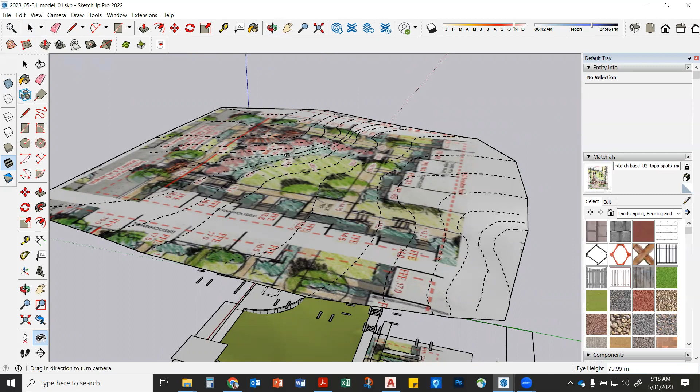So that's just how you pull topo in, as long as the topo has elevation. In the PDF I gave to you, you can see how to assign elevation to polylines. Or you can do the same - if you don't have them, watch. We'll Control Z all that. You can do it, Control Y if I bring them in.

But look, let's say this one right here doesn't have an elevation - it's all the way down here at 0. But I know the elevation. What would I do? How would I get it at the correct elevation? You hit the move button, click right there, hit the up arrow, and then type in whatever the elevation is that you know or want it to be.

So you can draw your contours, bring them in here, and then actually assign the elevation. You could skip the whole CAD process if you wanted to, and just move them over. It would take a little bit longer to do them in here, but it would work. Everybody tracking with that? If you're not, don't worry.

We're covering the last bit pretty quick here. But isn't that great? So then you can quickly make terrain out of just your contours.

A lot of times when I'm actually doing real modeling for projects, I'm doing both of these. What gets messy is when you've got contours running along walls, because contours stack into a wall. SketchUp has a hard time with that - it won't build a surface directly vertically.

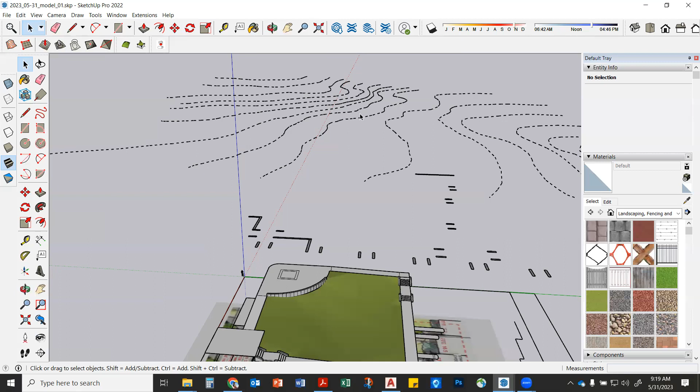So there's a couple ways to work around it. You can use Topo Shaper or Curviloft, which is another extension - I'll try to cover it on Friday. Or you can actually go in and stack up contours inside a wall, and SketchUp will make a slightly angled thing you can hide within the thickness of your wall. There's different ways of working around it, but it's super great.

Okay. All right, we got 40 minutes, maybe an hour and 10. You guys up for a little bit of drawing real quick? We good? Okay, let's draw.

Let's get off the screen for a minute. Stretch. Yeah.

Well, the folder has it in the CAD file. So I gave you guys the CAD file. You could go in, select that line work, select that guy and block it out like we talked about. You want me to send you the topo? Well, the topo is in the CAD file, you just have to open AutoCAD. But can you open AutoCAD? Some people can, yeah. I can send it to you.

Well, if you want to try it real quick to make sure you can do it with SketchUp, I'll send it. Do you have a WhatsApp with all these guys? Yes, if I can WhatsApp you the file right now, yeah.

Yeah, because this is a pretty fun thing to do. Hey, while we're waiting, I'm going to send out the topo file.

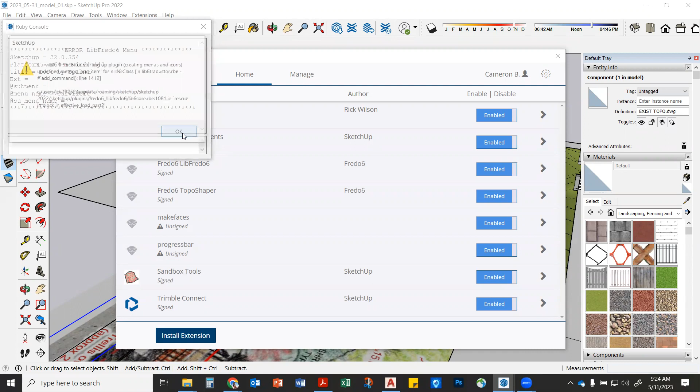It's so awesome, I'm gonna use it right now. Yeah, I'm gonna draw this elevation one real quick.

Okay, yeah, so pencil - oh, you only need like one or two. Just get two sheets, yeah, or even just one's fine. Yep, or two, I don't care. The main thing is we want to try to go quick.

The main thing you want - we're gonna do colored pencils, if we get time, we may not, okay? I'm gonna show you which colored pencils I use, but I want you to make sure you have a black colored pencil and just a regular pencil, yeah? And hopefully you brought your scale. Did you bring your scale today?